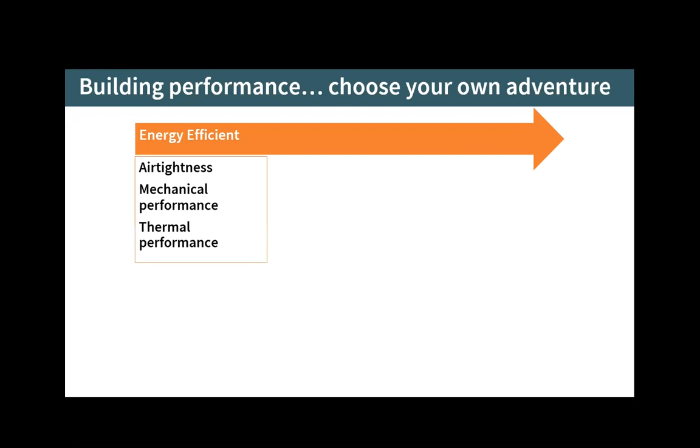So before we dive into the step code, just a little bit about building performance. It really is a bit of a choose your own adventure. There are a whole bunch of ways to assess residential building performance. The first would be whether or not the building is energy efficient, and there are some key criteria there. The next would be whether or not the building qualifies as a high performance building, and there's some other criteria. Most of these are supported by energy efficiency. And then the third is whether or not the building meets sustainability criteria.

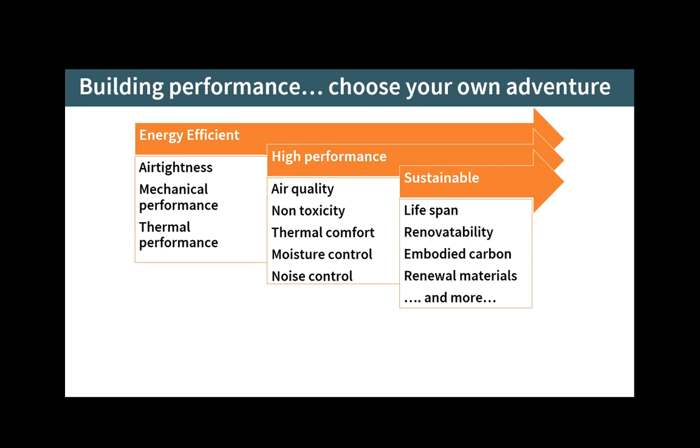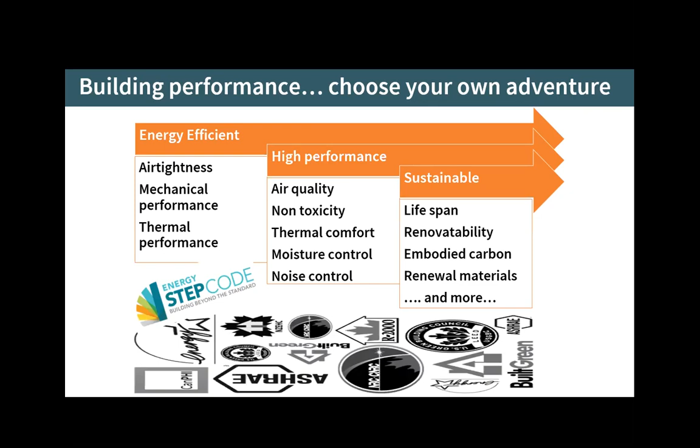There are a whole bunch of certifications out there and means of assessing the performance of a building. And the ratings and the certifications are really stretched across the full span of these. And the BC Energy Step Code, which we're going to talk about today, is really almost exclusively focused on energy efficiency.

So just a little bit about the Step Code. This is a graduated system for residential construction that lays over the health and safety requirements of the building code. It's about energy efficiency, and the criteria will become more stringent over time. Today, we're only going to talk about the part of the step code that's focused on residential under 3 stories. So step 1 of the code is really just the current BC building code with a blower door test being administered by a certified energy advisor, or EA.

It's a no-fail step, and it's really intended to familiarize builders with the step code, with working with an energy advisor, and how to conduct a blower door test. Then as we go up the 5 steps of the code, the standards become increasingly stringent. By 2022 in British Columbia, all homes in BC will have to meet step 3. And by 2032, all new homes in BC will have to meet step 5, which is net zero ready or passive house.

The really good news is that just by applying technologies that we've learned in trade school, we're already achieving step 4 with very little or no building cost premium over a minimum code built house, which we call the worst legally inhabitable home.

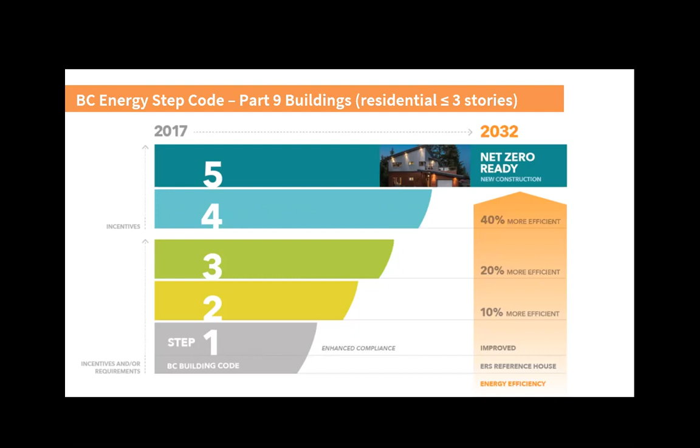So why does this matter to you in Alberta? The first reason is climate change. You're all aware that human-caused greenhouse gas emissions are driving contemporary climate change. Of all of the sources of greenhouse gases in Canada, generation of electricity and heat are almost half, and buildings account for 22% of that. There's a very clear opportunity to reduce emissions through retrofits and to prevent higher future emissions through energy efficient new construction. So that greenhouse gas reduction is the reason that building codes are changing.

Alberta hasn't made any moves to implement a BC style building code, but the National Energy Code for buildings is changing to be more like the BC Energy Step Code. It will be tiered, becoming progressively more efficient, leading to 2030 and net zero energy targets for residential construction. How that gets adopted and implemented will be up to each province, but it's very clear that as a nation, the Canadian building industry is going through a technology and standards upgrade that every builder needs to be keenly aware of.

So, which leads to the next reason that the BC Step Code matters in Alberta, and that is that your clients are changing. I don't have similar data for Canada, but a 2019 study by the US National Association of Home Builders found that 91% of home buyers considered a whole house Energy Star rating as either essential or desirable, and 4 out of the top 10 must-have criteria are energy related. So if your customers haven't already asked you about energy efficiency, comfort, sustainability, they certainly will, regardless of regulatory changes in Alberta. Right next door, BC's Step Code is very likely already an influencer of change in the Bow Valley.

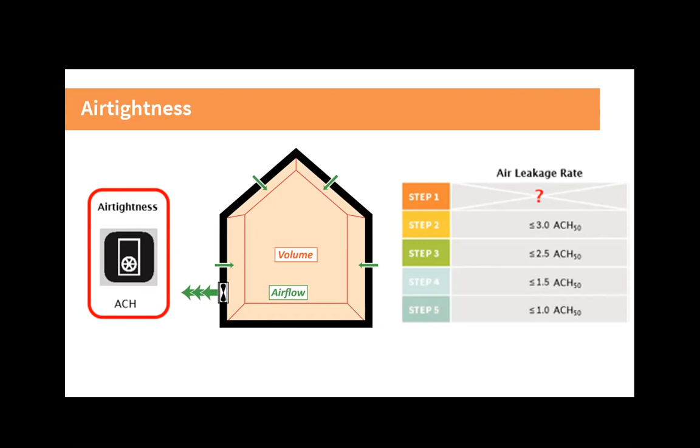The second test is at occupancy, just to verify what we have done. Usually this blower door test gets better because we've put in the rest of the insulation, we've added drywall, all these things add to an increased airtightness. And the blower door day is always an exciting day for our crew because this is how they can see the quality of their work in one single metric. So usually a highlight for the project. Our standard target at ThinkBright is below 1 air change per hour. So we typically hit between 0.6 and 1.

The second metric is mechanical energy use intensity, the MEUI. This is the metric for mechanical and systems energy use over a year. It is estimated by using an energy model and expressed in kilowatt hours per meter squared per year, and lower is better. The MEUI includes space heating and space cooling, fans, water heating equipment, pumps, and HVAC equipment. It excludes electrical loads such as miscellaneous receptacles and lighting.

This metric is quite complex, and it is possible to spend a ton of money unnecessarily in this area. It's essential that you work with an energy advisor to determine the most cost-effective way to reduce the MEUI of any given home. So there is lots of fancy machinery out there, and you don't want to overload your home. The idea is to hit just the right amount of firepower to keep that home running just right. So by way of reference, there is no metric for step 1, while at step 5, it is possible to achieve a net zero energy rating if you're hitting your MEUI just right.

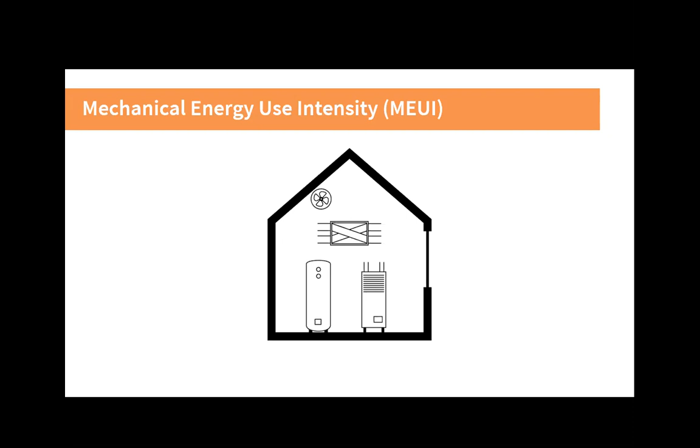The third metric is the thermal energy demand intensity, the TEDI metric. TEDI is a measure of the annual heating demand and includes energy gains and losses through the building enclosure, internal heat gains, and heat recovery efficiencies. A lower TEDI means the annual heating required by the building for space conditioning and for conditioning of ventilation air is lowered. Like the MEUI, TEDI is estimated by using an energy model, also expressed in kilowatt hours per meter squared per year, and again, lower is better.

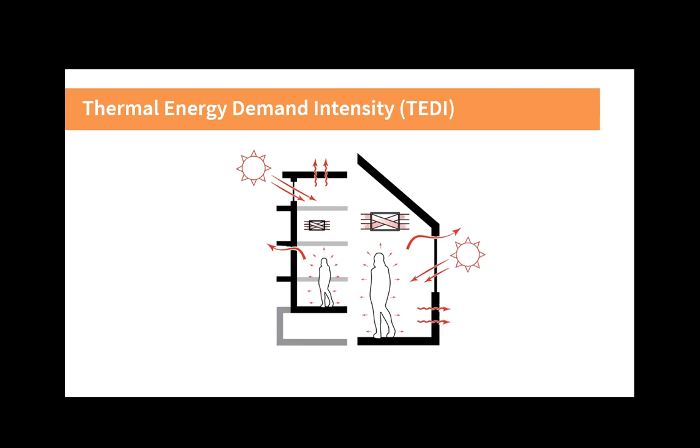TEDI considers thermal transmittance of the building enclosure, for example, wall assemblies, roof assemblies, windows, doors, skylights, those sorts of things. Solar heat gains through building enclosure components are also included, air leakage through the air barrier system, internal heat gains from occupants and equipment, and heat recovery from exhaust ventilation. Better and more insulation and better windows and doors are the major factors for success in this metric.

Thanks, Paul. So I'm just going to talk briefly about 4 critical administrative processes for energy efficiency success, and this doesn't matter which province you're in. The first is to be working with a certified energy advisor every single time you build a house. These are the people who are going to get you through cost effectively with the least amount of headache.

The next is to plan for energy efficiency from the start. And I mean, like from the first moment that you're laying out development, or the first moment that you're meeting with a client on a custom home. The form matters, the mechanical specs for a home matter. And if you are planning from the start, it is absolutely possible to do this cost effectively. It's very expensive to solve energy efficiency problems further down the road.

Next, you really need to collaborate with your trades. They all come armed with these nasty little utility knives, and they can really mess up a well planned out house, as can your own crews. But if you're collaborating with your trades, you've got them on board, you're supporting their training about what you're trying to achieve, you'll find that they jump right on board with you. We have pretty keen sub-trades who are also very good at spreading word of mouth about what we do.

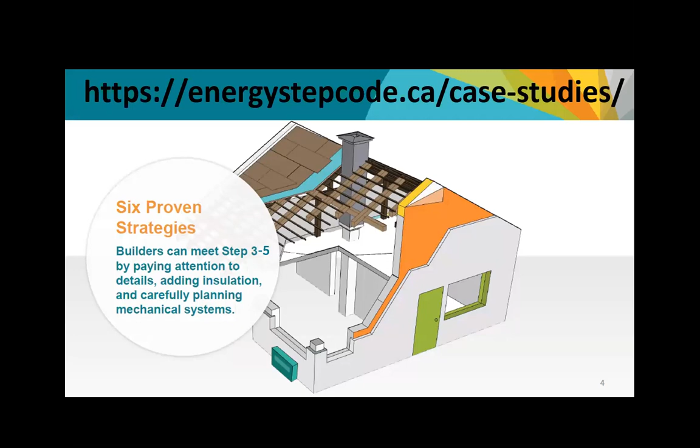So now we're going to turn to the step code and a case study of a home that we built in Invermere. In 2018, BC's Energy Step Code Council produced 6 case studies of examples of cost-effective homes from around BC that met step 3 or higher. One of our homes in Invermere was selected as the model for success in cold weather climate zones. And you can see the website is up there if you want to look at the other case studies. They're pretty great. And I'm going to turn it over to Paul now.

Thank you. So there are 6 proven strategies to meet the metrics for Energy Step Code. And so the first is to boost your insulation, ventilate smartly.

So each home needs an HRV, mind your machines, that's sizing your heating and cooling equipment correctly, minimizing thermal bridging, so this is done at the planning stages and during construction, sealing it up, also done during construction, and you really need to think about your doors and windows.

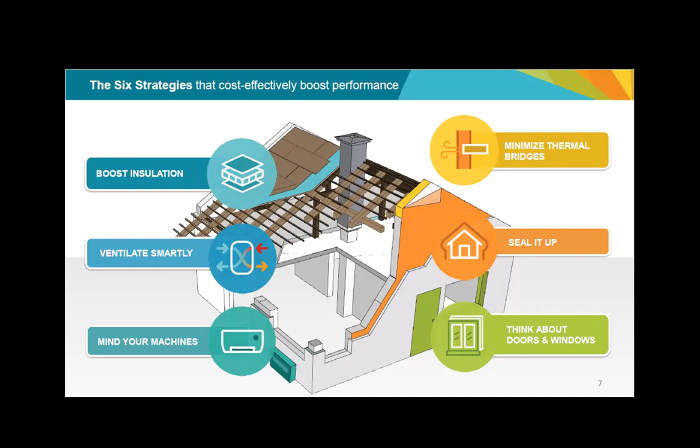So this is the home that we built in Invermere, and it's in the Westside Park neighborhood. It's a single-family starter home, but this home achieved quite a high rating. It achieved step 4 and worked out really well for us. So people always ask, you know, how much more does this actually cost? In this case, it cost us about 2% more, and that was based on our own budgeting.

So as you move through designing and building your home, you need to think about the strategies for meeting the metrics. So with windows and doors, at this particular home, we chose a triple pane low E argon filled window. We used an all-weather product. We've since moved on from using all-weather. It worked out fine for this project, but there's definitely better product out there in the same price point. So typically we're using a European tilt and turn window now, also made in Canada, but out on the West Coast.

You need to boost your insulation. So for this home, we built a 2x4 double stud wall with a thermal break in between. So the interior wall was insulated with an R12. The space between is insulated to R12, and then the outer wall is insulated to R12. So for a total of 36.

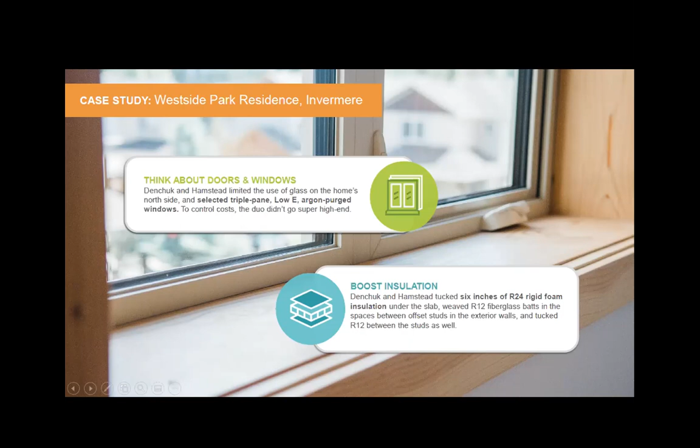And then as you are building, you need to seal it up. So in this home, our interior wall sheathing, which is a structural wall, we use that sheathing to seal the walls. So it was a 7/16 OSB that we used, and then we used a tape to seal all the joints shut on the sheathing and any penetrations.

And then you want to continue that sealing down through your foundation level. We use ICF, so ICF seals up really well. We just connected the floor system to the walls and the floor system to the ICF, and down under the slab, you'll want to connect that to your vapor barrier below the slab, and up to the roof. The walls are also taped and sealed to the ceiling service layer, which we also used OSB to create an air vapor barrier along the ceiling.

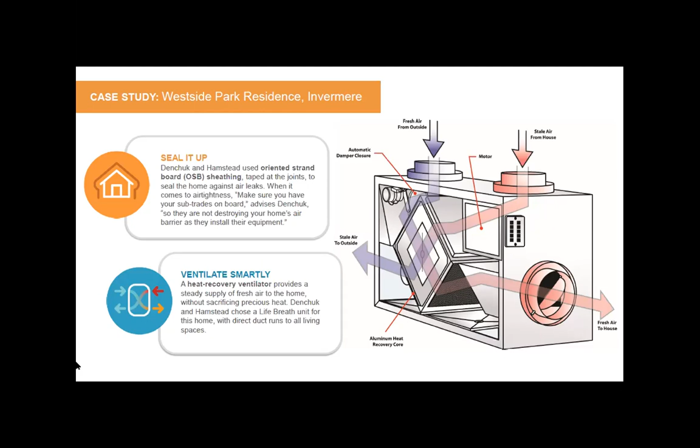So now that we've sealed up the home really well, we need to ventilate. And every home that we build gets an HRV. We don't go really crazy with this. You definitely can. Our local contractor supplies us with a Life Breath HRV, and we're getting good results from it. You can definitely spend a lot more money on this. The top end manufacturer here that you can get is a Zehnder unit, and they work remarkably well. We did use it in one home recently and are very happy with the results.

And then you need to mind your machines. You've just built a super energy efficient home. We don't need to put a lot of firepower into it. You know, people are always asking us about geothermal heat and what kind of furnace goes in and all that sort of stuff. We typically heat our homes with a single or maybe two head mini split ductless heat pump. And the unit that we use is good down to -24, and it's proven itself to work very effectively.

Unfortunately, in our zone, we need to meet the code down to -30. These machines are only rated to -24, although they do keep producing heat beyond the -24 and beyond -30. We do need to add baseboard heaters in each room, and we typically use a very small baseboard heater, the 500 watts for each bedroom, living area, kitchen, that sort of thing.

So then as you're planning your building and as you're building it, you want to minimize the thermal bridges. So, like I said before, we do a double stud wall. So that double stud wall creates a great thermal break through the wall system. In the ceiling, we do a ceiling service layer, so that helps us to stop the thermal bridging in the ceiling. And in the attic, we load it up with insulation.

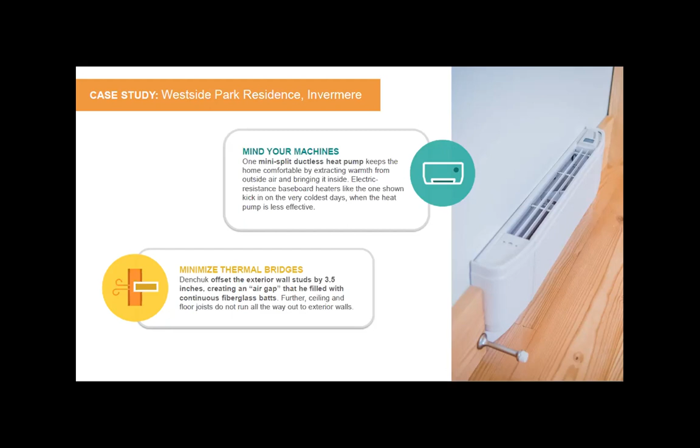Another home that we completed near Panorama Resort in 2019 achieved a high performance. It achieved step 4, and it was very much at mid-market prices. But what the homeowners love most, and it's not just this home, it's all of these homes, is year-round thermal comfort, natural light, fresh air, and very, very quiet, despite this home being located on a busy resort access road.

Further, although this home achieved step 4 at completion, they have since reduced their energy consumption through the way they operate the home. And now they've installed solar panels, and they will likely be able to achieve net zero by the end of this year. So that's pretty much it. I hope we've been able to demonstrate credibly that it's possible using some really common building strategies and technologies to achieve very high performance and energy efficiency in residential construction without breaking the bank.